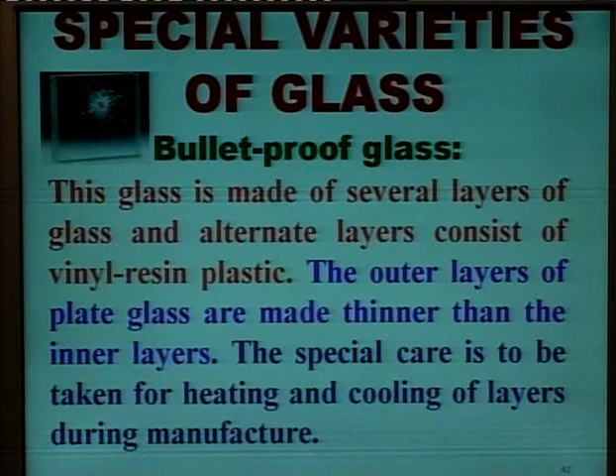The thickness of bulletproof glass may vary from 15 mm to 75 mm or more. It will not allow a bullet to pass through it. Moreover, it doesn't scatter.

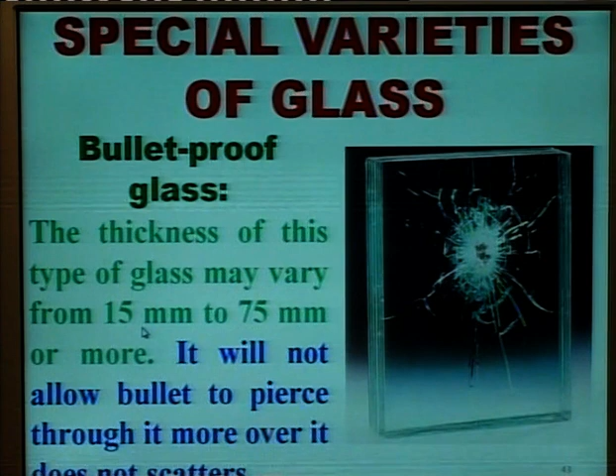Next variety of the glass is fiber glass. Fiber glass is composed of minute glass rods, and each glass rod resembles the parent material in all respects. It is proof against fire, vermin, water and acids.

It can be prepared either in the form of continuous strands just like silk, or in the staple form just like wool. So, fiberglass is made up of minute glass rods, each resembling the parent glass, and it is proof against fire, vermin, water and acids.

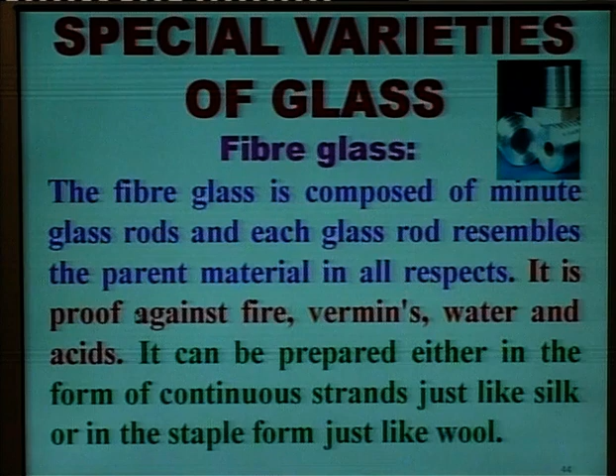Fiberglass is a special type of glass, and it is used for thermal insulation, sheets, and fiberglass reinforced plastics.

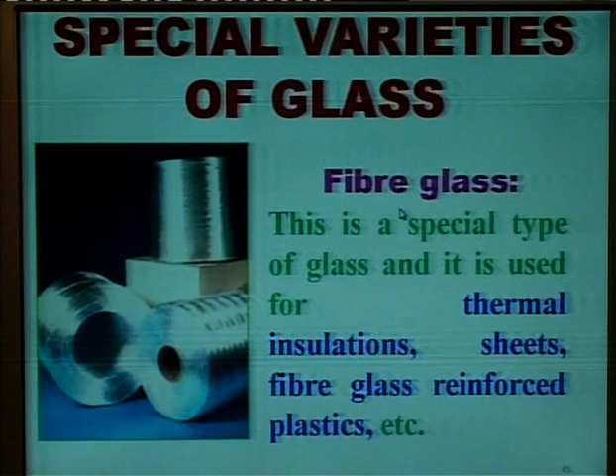Next variety is float glass. The molten glass coming out of the furnace is allowed to float on molten tin. The glass thus formed is known as float glass. It is then further annealed to remove all stresses.

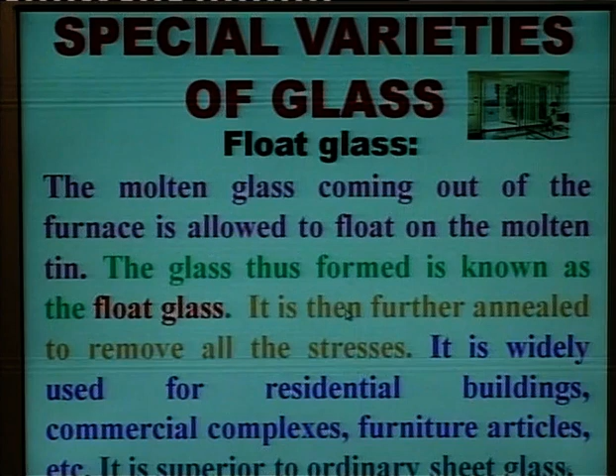It is widely used for residential buildings, commercial complexes, furniture articles, etc. It is superior to ordinary sheet glass. So, float glass is molten glass from the furnace allowed to float on molten tin, used for residential buildings, commercial complexes and furniture articles. These are the pictures of float glass.

Next variety is foam glass. Foam glass is prepared in the form of rectangular blocks. Finely ground glass and carbon are thoroughly mixed and the mixture is then melted in a furnace. At the time of melting, the mixture expands and changes into black foam.

Foam glass is prepared in the form of rectangular blocks. Finely ground glass and carbon are mixed, melted in a furnace, and the mixture expands and changes into black foam.

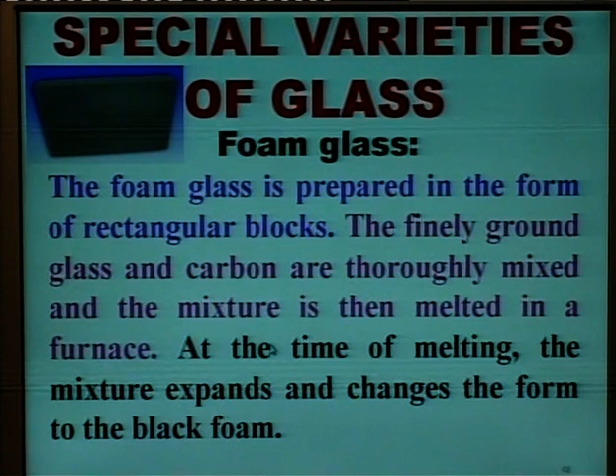The resulting glass material floats in water and it can be cut like wood as it contains millions of inert air cells. It is fireproof, rigid and an excellent heat insulator. It can be used as a substitute for cork in air conditioning and refrigeration.

The resulting foam glass floats in water and can be cut like wood as it contains millions of inert air cells. It is fireproof, rigid and an excellent heat insulator, used as a substitute for cork in air conditioning and refrigeration.

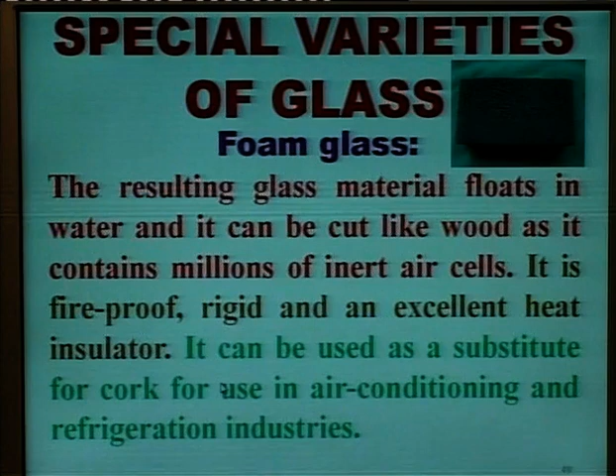Next is glass blocks. These are partially evacuated and completely sealed hollow units which are formed by fusing together two halves of pressed glass.

The edges are coated with a grit bearing plastic material so that a permanent and effective bond with the mortar is ensured. So, glass blocks are partially evacuated, completely sealed hollow units formed by fusing together two halves of pressed glass.

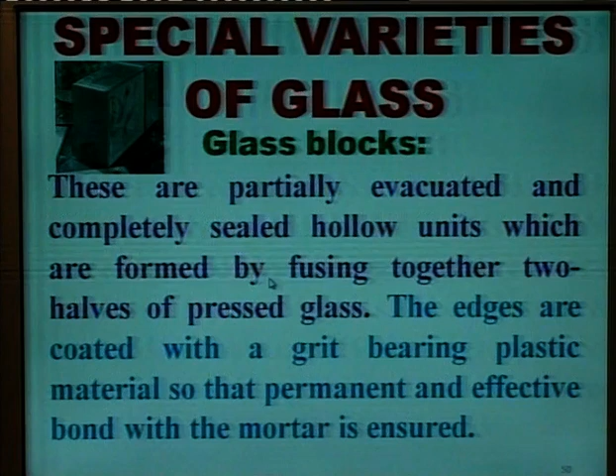Glass blocks are available in square sizes with dimensions of 150 mm, 200 mm and 300 mm, with an approximate thickness of 100 mm.

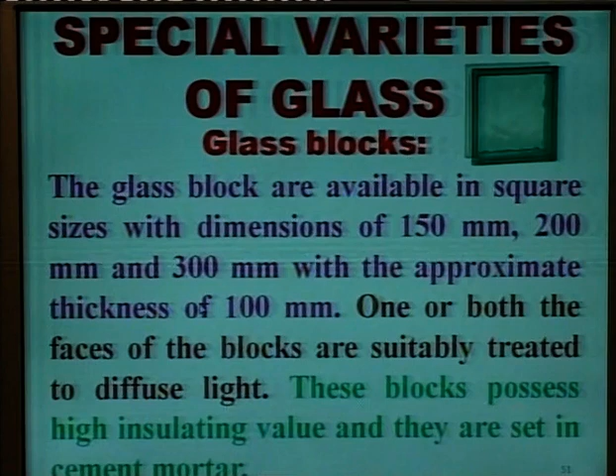One or both faces of the blocks are suitably treated to diffuse light. These blocks possess high insulating value and are set in cement mortar.

Next is heat excluding glass. This glass allows light to pass through it, but it eliminates heat. It is used for windows of coaches of higher class in railways, and in window panels of important buildings.

Next is perforated glass. In this type, the perforations are made in sheet glass with the help of rollers. The perforations may be made during manufacturing or after manufacturing. It is used for panels in ventilators.

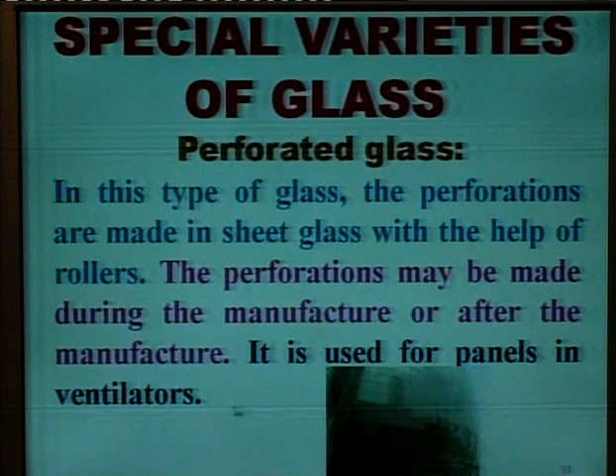Obscured glass is used at places where light is to be transmitted but vision is to be obscured. It has one surface made opaque by melting powdered glass upon the surface, and it can be prepared by the rubbing action of sandblast. This type of glass is useful for public toilets, office doors and partitions.

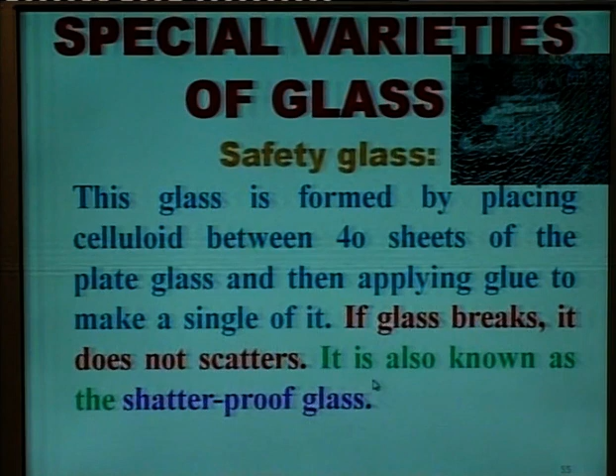Next variety is safety glass. This glass is formed by placing celluloid between sheets of plate glass and then applying glue to make it single. If this glass breaks, it doesn't scatter, so it is also known as shatter proof glass.

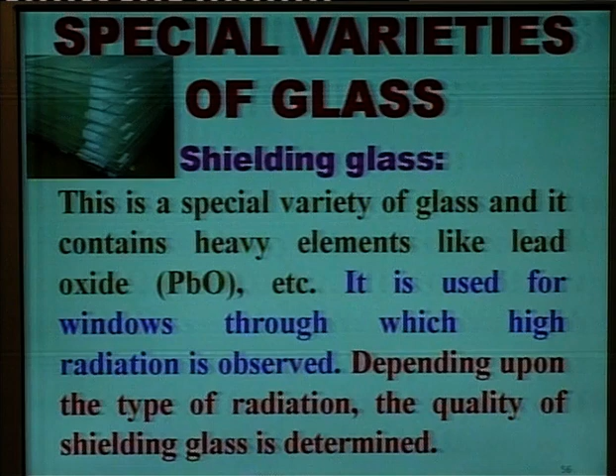Shielding glass is a special variety of glass containing heavy elements like lead oxide. It is used for windows through which high radiation is observed. Depending upon the type of radiation, the quality of shielding glass is determined.

Wired glass: in this type, a steel wire mesh is placed in the glass during rolling operations. If this glass breaks, the pieces are held in position by the mesh. This glass is also fire resistant and is used for roofs, skylights, fire resistant doors and windows.

Now, applications of glass. First, they are used in automobile industries. Fiberglass reinforced with plastics can be used in the construction of cars and trucks.

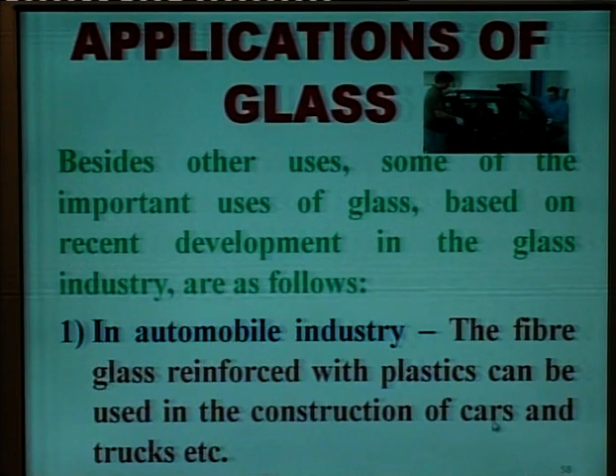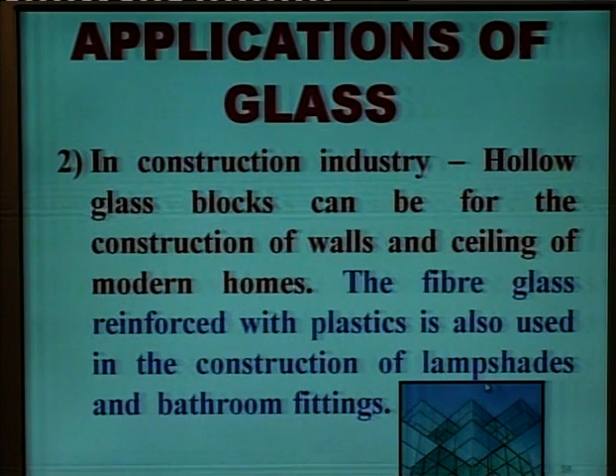In construction industries, hollow glass blocks can be used for the construction of walls and ceilings of modern homes. Fiberglass reinforced with plastics is also used in the construction of lampshades and bathroom fittings.

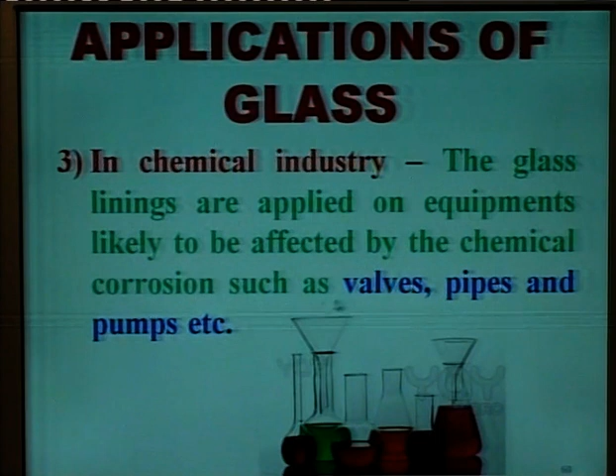In chemical industries, glass linings are applied on equipment likely to be affected by chemical corrosion, such as valves, pipes and pumps.

Glass is also used to form a rifle barrel, which is lighter and stronger than the conventional type. It is also used in the construction of noses of deep diving vehicles.

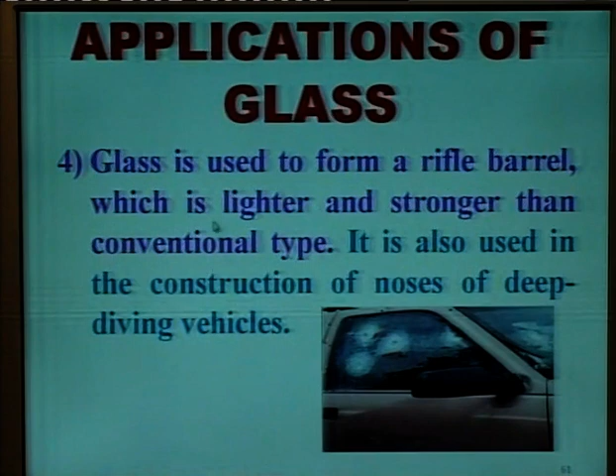So today we have discussed about glass, its composition, types, some special varieties of glass, and applications of glass. Okay, thank you.